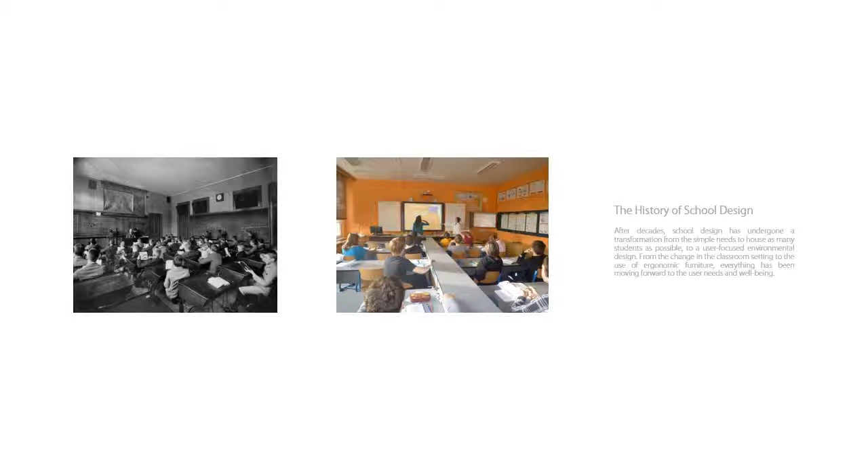Well-being can be described as judging life positively and feeling good. Well-being is an important factor for physical and psychological health. Therefore, to study the well-being of people is a necessary way to care about their health.

The well-being of an individual can be achieved through certain aspects of the physical environment. Poor environmental quality can threaten a person's well-being. Human-friendly environments are the foundation. Within it, people can reach their goals and improve their potential.

The purpose of an educational building is to provide a physical, social, and psychological environment that is conducive to teaching, learning, and research. Also, from a business perspective, students are the most important customers of schools, and the school is a student service provider.

So meeting the needs and expectations of students will lead to their satisfaction with their learning experience. Since living experience in the building is an essential component of quality of life, the healthy building is demanded for education.

The World Health Organization defined a healthy building in terms of its indoor air quality, thermal comfort, lighting quality, and acoustics. A healthy building is free of toxic materials and protects the health and comfort of its occupants

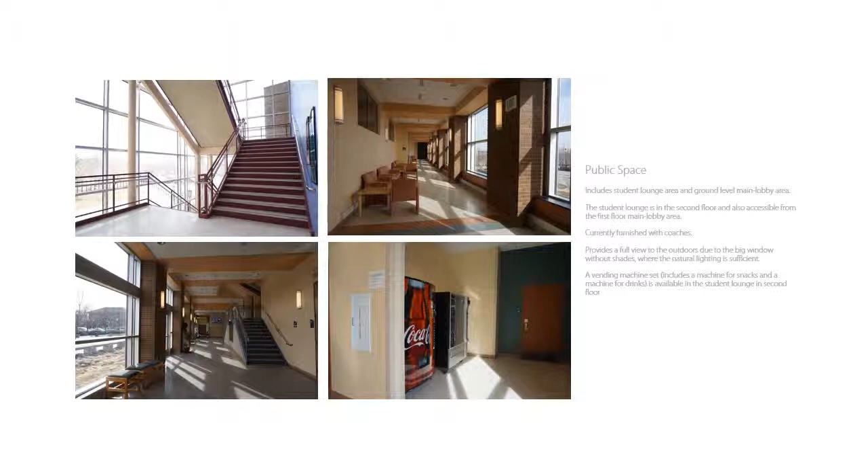Lecture classrooms in PAO Hall are mainly located in the basement and first floor, where there is basically no window and no access to nature. The classroom setting is the same as a traditional classroom, with desks arranged in straight rows and a teacher's teaching station in the front of the room.

The furniture in the classroom is non-adjustable chairs and desks. The classrooms are painted in a beige tone, and vinyl tiles were applied as flooring in the lecture classrooms.

Design studios in PAO Hall are located from basement to third floor. Some of the design studios on the first, second, and third floor have windows in the room. However, for those studios located in the basement, windows and the ability to access nature are not available.

The furniture in the design studio is adjustable chairs and desks. The design studios are painted in a beige tone. Vinyl tiles were applied as flooring in the design studio as well.

To study the selected spaces, a pilot study was conducted before the full-scale survey using the survey questionnaire, and participants' feedback was invited about the questionnaire so that it could be revised and modified. After the pilot study, the layout and wording of the questionnaire were changed.

After analyzing the data, the features that are very important and had good performance, the features that need to improve immediately, and the features where the priority for occupants' well-being is low in public space, lecture classroom, and design studio have been shown in matrices.

After the study, the remodeling design project of PAO Hall has been started. The goal of the design is improving occupants' well-being in PAO Hall at Purdue University.

Since PAO Hall is an educational building occupied by students, the forest as a design element will be applied through the whole design process to mimic the feeling of staying in nature and achieve the design goal of an educational building that can meet students' well-being.

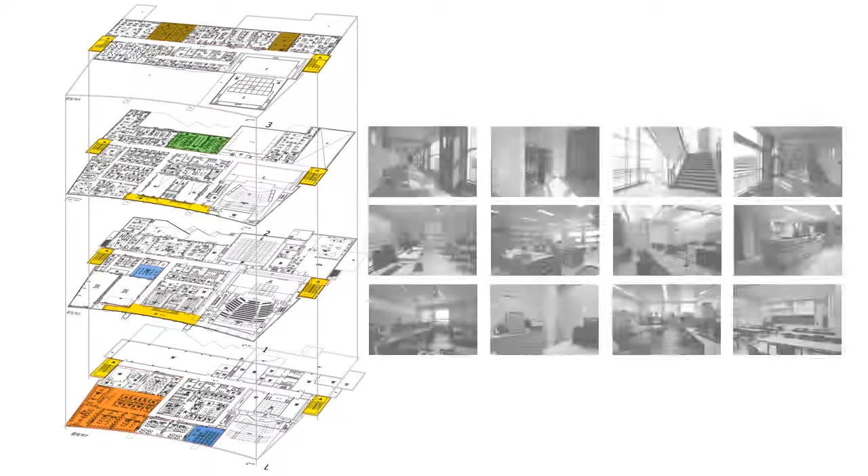The original floor plan and space layout has been studied and improved. After the remodel, an extra lobby area has been added to the main floor lobby. The Visual Communication Design department has been moved from the basement to the main floor.

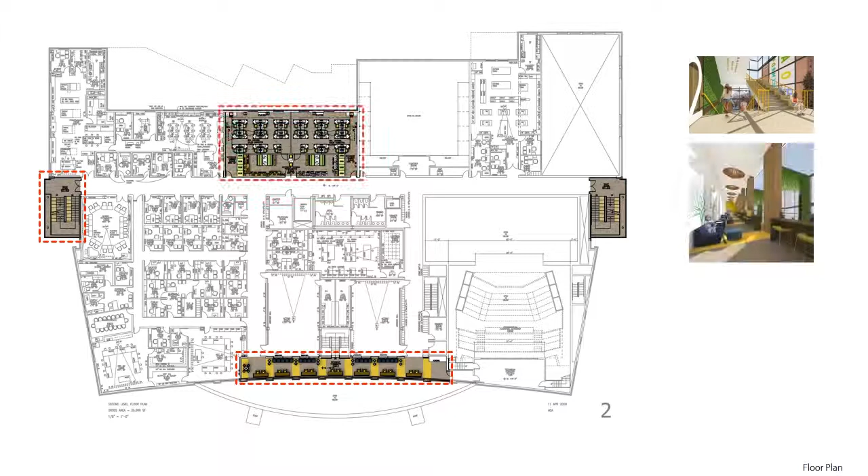The location of the lecture classroom has been changed to the basement, and the room layout of design studios, lecture classrooms, and public spaces has been changed.

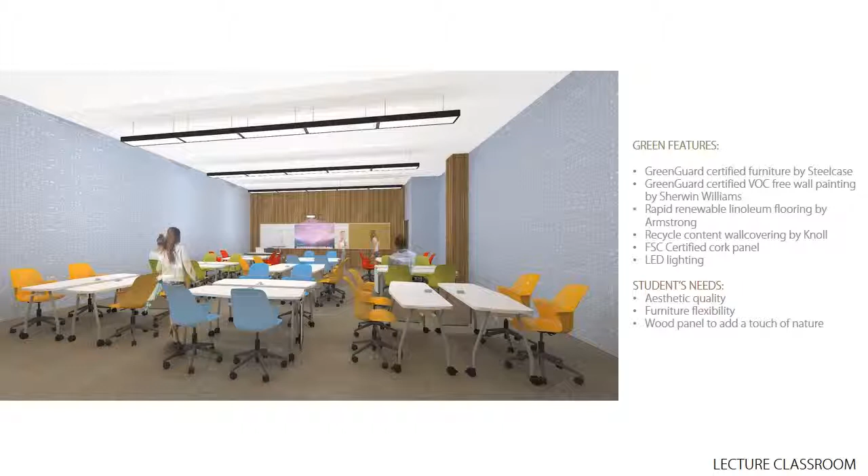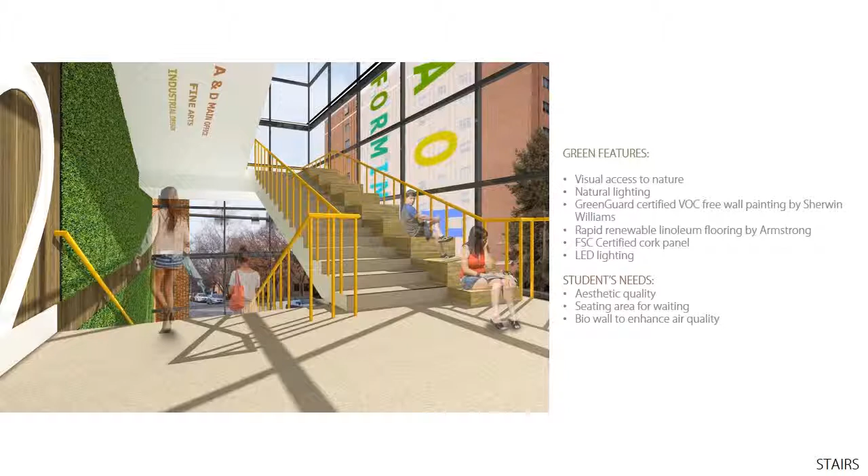The lecture classroom in the basement, main floor lobby, student lounge on the second floor, the stairs on the two sides of the building, the Visual Communication department, the interior design studio, and the industrial design studio have been developed, including green features and features that meet the students' needs.